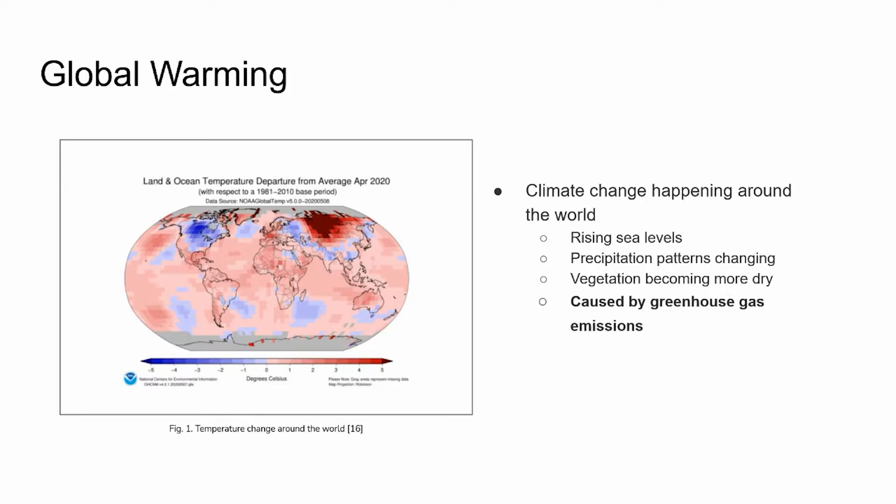Climate change for the environment and the world will raise sea levels, change precipitation patterns, and cause vegetation to become more dry, all caused by greenhouse emissions. How can we protect against greenhouse emissions?

For that, we have the Greenhouse Gas Protocol, GHGP, recognized by the UK government, developed by the World Business Council for Sustainable Development and the World Resources Institute. The GHGP helps define how companies manage and report greenhouse gas emissions, GHG. Crucially, it establishes three categories of emissions: Scope 1, Scope 2, and Scope 3.

In the article, we highlight two important notes. First, natural gas and oil for electricity and heat in buildings account for 25% of greenhouse emissions. Second, a significant amount of US commercial building annual energy usage comes from two categories: 32% to heating, ventilation, and air conditioning (HVAC), and 25% to lighting.

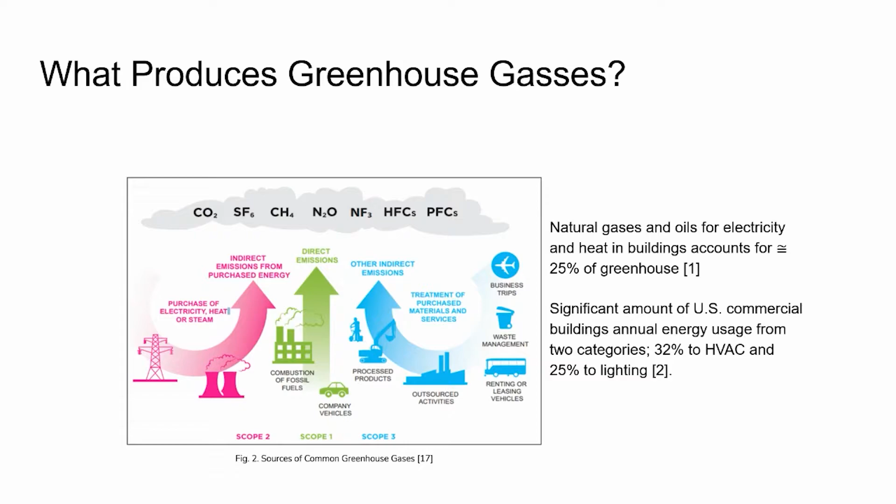For those reasons, our solution is to change people's consumption with smart windows. Recently, people have raised their trust in smart windows since they are environmentally friendly, cost effective, and practical.

As previously mentioned, global warming continues to negatively impact the environment around us. Recently, Silicon Valley and all across California there have been many wildfires that have ravaged the state, for example the SCU Lightning Complex and the LNU Lightning Complex, which both happened back in August. The duration of the wildfire season has been getting longer due to a prolonged drought and an increase in drier vegetation, all of which is caused by climate change.

With climate change being the main cause for these disastrous events, we ask you to consider implementing smart windows in your new facility to try and mitigate these effects.

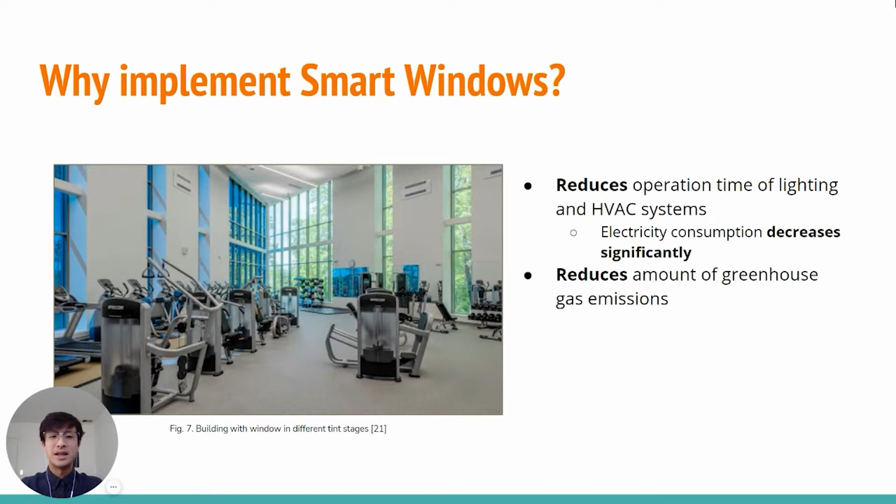With smart windows, the operation time of the HVAC systems and the lighting fixtures around the building will see a significant decrease. Less electricity spent on these systems will lower your energy consumption and decrease the amount of carbon dioxide emitted. Ultimately, this plan will help your company save money on the monthly electricity bill while also helping the environment by reducing carbon emissions.

Firstly, our research teams will analyze the three main types of smart windows: electrochromic, thermochromic, and photochromic windows. We must understand how each window functions and what the most optimal operating environment is for them. Because of climate change, we will also cross-reference case studies performed in other parts of the world that have a similar weather pattern to the one we are projected to experience in the near future.

In this case, we focused on one from Madrid, Spain. The building specifications and calculations for energy consumption, return on investment, and many more will be based on the Building America Center 2, which is located in North San Jose.

All of this data will be recorded on an evaluation sheet that our teams will collaborate on.

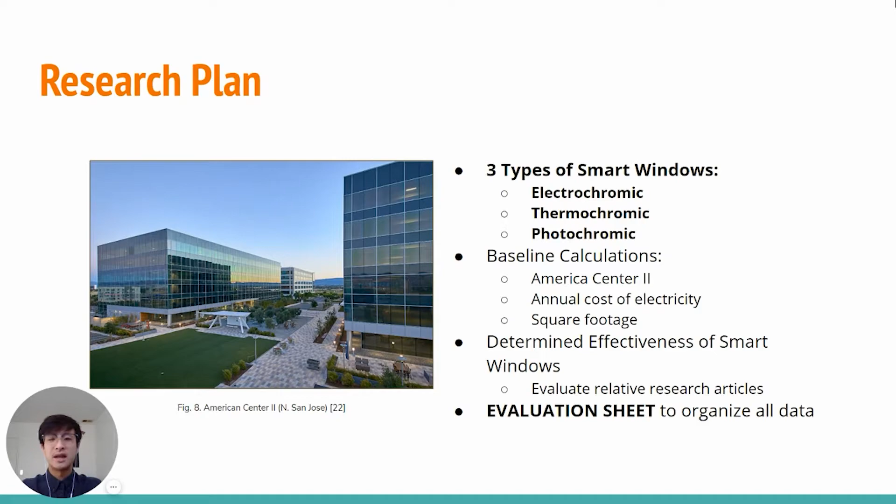There are three types of windows. The first is electrochromic: electrochromic smart window relies on an electric source of energy, such as voltage, for functionality rather than a natural source of energy such as solar energy from the sun. The tint of electrochromic glass is controlled by the amount of voltage applied to the glass. Applying a lower voltage of electricity darkens the coating as lithium ions and electrons transfer from one electrochromic layer to another. Removing the voltage and reversing its polarity causes the ions and electrons to return to their original layers, causing the glass to lighten and return to its clear state.

The second is a thermochromic smart window. It simply uses the heat from direct sunlight to tint the window when necessary. The more direct and intense the sunlight is on the glass, the darker it becomes. This allows the windows to dramatically reduce heat loading into the building, and because the glass transmission adapts continuously over the range of temperature, a natural balance and maximum use of daylighting is achieved. By design, thermochromic windows help reduce glare, fading, and noise, and increase safety.

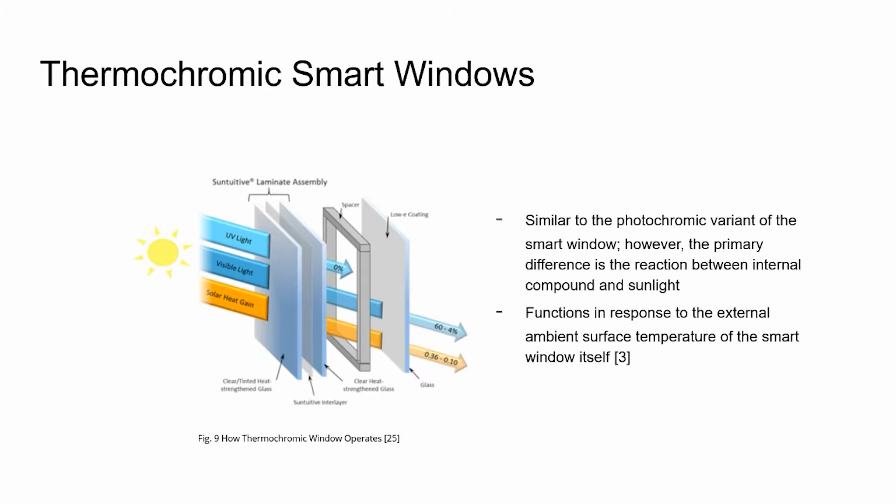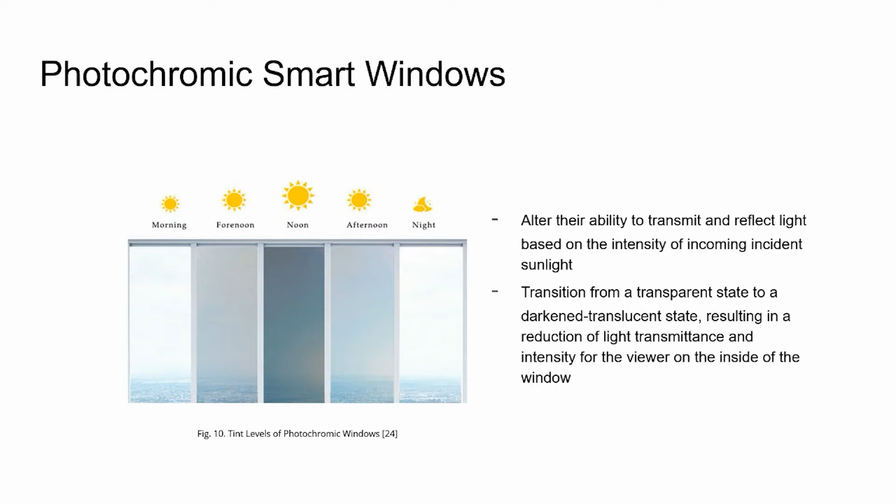The third is the photochromic smart window. Photochromic is a very common material we already use, like eyewear made with photochromic lenses. It transitions from light to dark when activated by light. The light must be intense enough, typically with enough ultraviolet radiation, for the photochromic lens to react, and vice versa — when the light that activated the lens disappears or isn't intense enough, the lens will return to its clear, untinted state again.

In order to determine a baseline for the increase or reduction among all smart windows for variables such as energy cost, energy consumption, and greenhouse gas emissions, external research articles must be considered. Luckily, researcher Tällberg and his group of scientists performed a simulation to determine the approximate amount of energy usage between these smart windows.

This study focused on three distinctive climates across the world. However, we'll be looking at the Madrid, Spain simulation results, as that city's climate is relatively similar to our climate in the Bay Area. Overall, the big takeaway from the simulation is that the primary source of reducing annual energy consumption is through reducing the need to provide electricity for cooling, especially in the hotter months.

This relationship can be seen in the figure on the right, where each factor of heat gain and loss is specified within the graphs. Looking at actual numbers, the electrochromic smart window requires 17% more power for the internal heat of a building to remain at a constant temperature, but we can clearly see that the electrochromic variant reduces up to 40% more energy consumption in the warmer months compared to the static window.

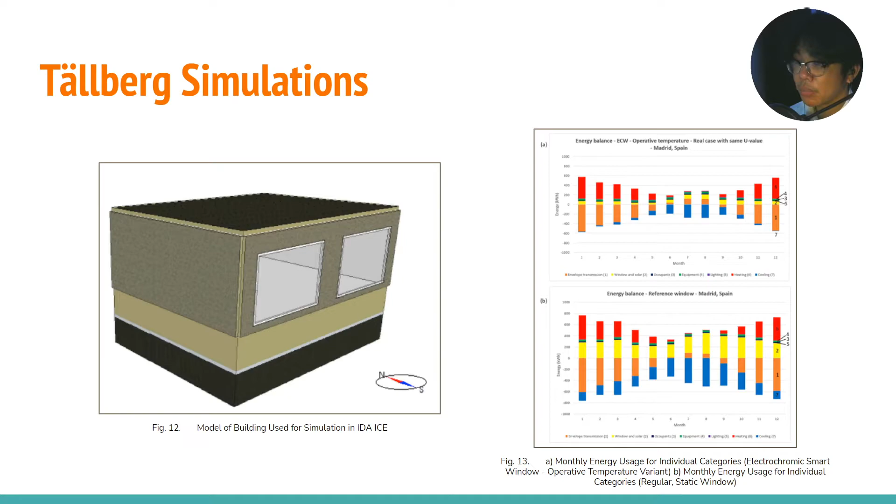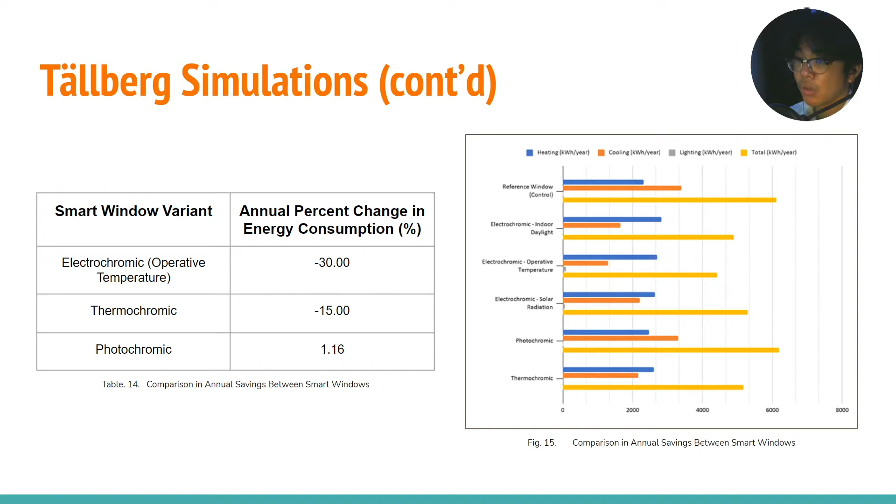Overall, across all three smart window variants, Tällberg and his group's simulations demonstrate that the electrochromic operative temperature variant smart window reduces up to 30% in annual energy consumption, with thermochromic smart windows reducing up to 15%, and photochromic smart windows actually requiring 1.16% more energy compared to the static window.

When determining which smart window is best for the company, we must first dig deeper into the topic and discuss the optical parameters that should best be considered. Based on Tällberg and his group's simulations, it's important to choose a smart window that is most efficient in the summer months in order to reduce air conditioning and cooling loads.

As a result, it's important to choose a smart window with a relatively low U value. This narrows our choices to the electrochromic and thermochromic smart windows. If the U value is substantially high, such as for the photochromic smart window, the high rate of heat transfer across the window will make cooling more inefficient, resulting in greater power consumption.

While both the thermochromic and electrochromic smart windows possess relatively similar SHGC values, the electrochromic variant possesses a larger SHGC value in its clear state and a lower SHGC value in its darkened state compared to its counterpart. As a result, the electrochromic window can be more flexible and adaptable than the thermochromic window, allowing the building's heating system to be more effective.

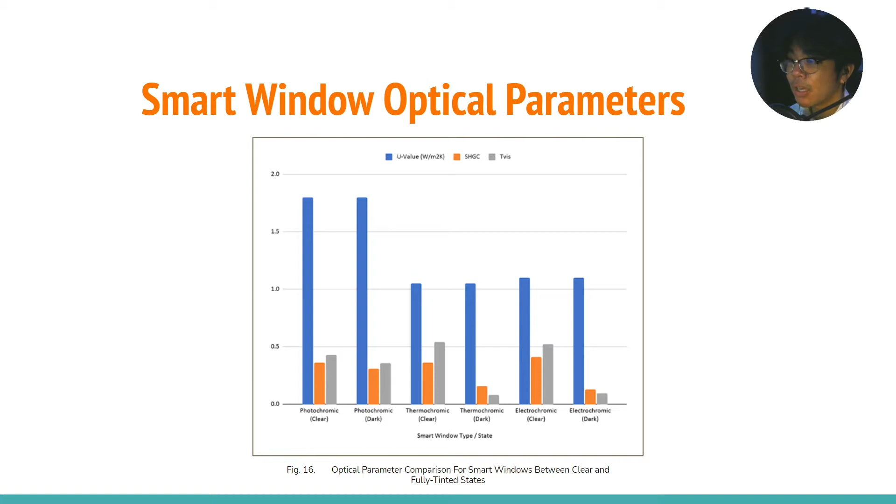Overall, the thermochromic and electrochromic smart windows possess similar optical characteristics. However, the electrochromic variant is most effective to a certain degree in reducing overall energy consumption due to its dynamic control input.

The model for the company building is based on the America Center 2 commercial building in San Jose, in which the total acreage of the building is about 460,000 square feet.

According to the U.S. Energy Information Administration, the monthly energy consumption for a commercial building is approximately 16 kilowatt hours per square foot. Since we're assuming Silicon Valley Power is the primary electricity utility providing energy to this building, the average cost of electricity is approximately 14 cents per kilowatt hour.

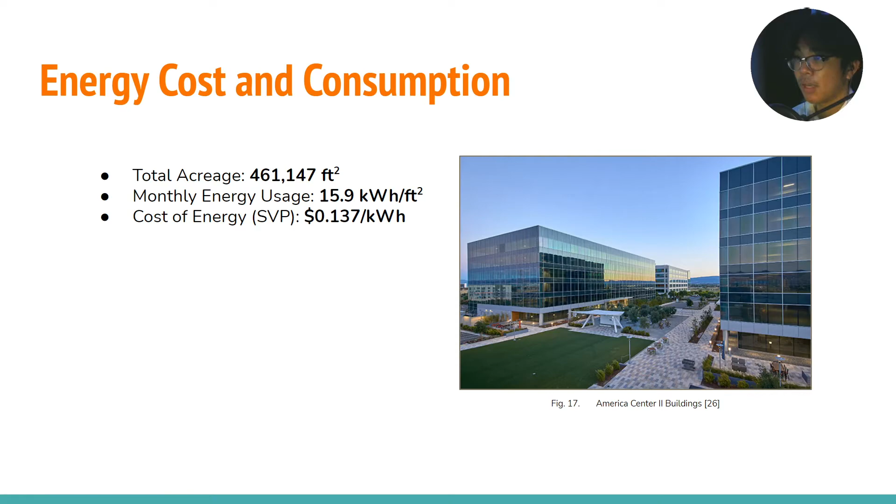Figures 18 and 19 illustrate and compare the energy consumption and electricity cost, respectively, between each smart window variant and regular static windows.

Thus, the potential monthly savings is calculated as the net difference in electricity cost between a control window and the respective smart window. As a result, the monthly savings in electricity are added within the current investment return.

Overall, the energy consumption for the regular windows is spread accordingly throughout each month, proportionally based on intuitive and arbitrary trends of power usage.

The estimated amount of consumed electricity and energy costs for each smart window variant is, of course, proportional to the results from the previous section with the Madrid, Spain energy simulations.

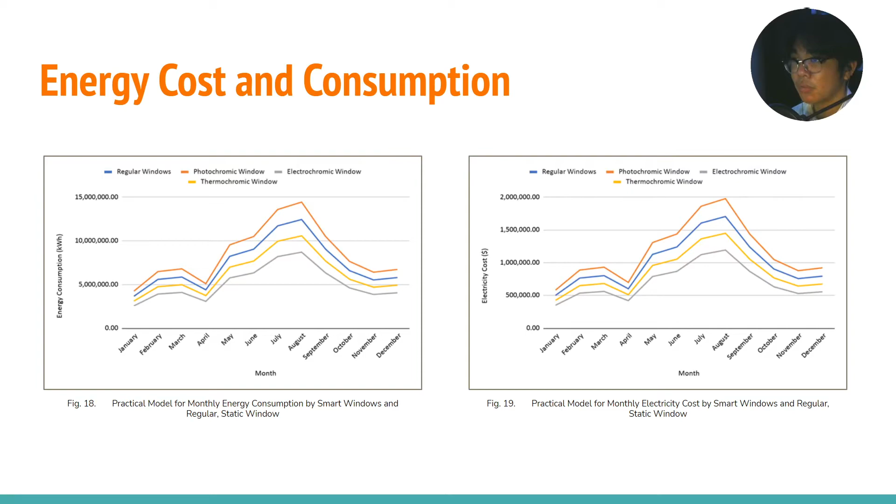When it comes to determining which smart window the company should invest in, there are two primary deciding factors that Samsung Group must consider: risk and return on investment.

While assuming that the monthly revenue of Samsung Group is constant across all smart windows, the amount of money saved from energy consumption per month will pay itself toward the net return on investment for that specific month.

Investing in the electrochromic window is considered a higher risk for the company due to the substantially large initial cost and a greater time to break even.

However, the overall amount of potential savings in energy consumption in the long term is significant. As a result of this significant cost reduction toward electricity, the saved funding can be utilized for other sectors of infrastructure within the company.

In contrast, investing in a thermochromic window can be considered relatively low risk for the investor due to the significantly smaller initial cost and a lower time needed to break even.

However, the business will not generate the greatest amount of potential savings in the long term relative to the electrochromic window.

Samsung Group is on par with developed technological companies such as Google and Microsoft. As a result, they possess a large amount of funding and are willing to invest in a more expensive product.

If the product is much more cost-effective in the long term compared to other related devices, Samsung Group will also be more willing to invest in a product that requires a higher upfront cost.

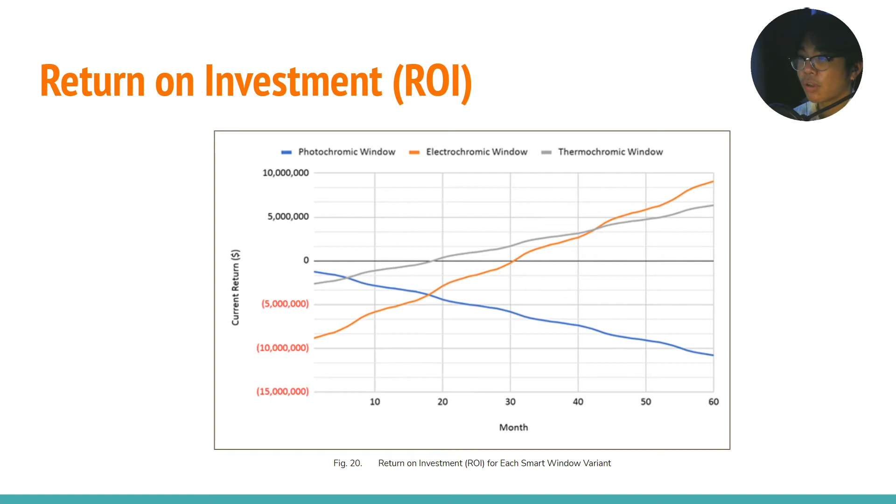Overall, the electrochromic window variant based on operative temperature is the type of smart window we are proposing, in order to provide the company with greater reductions in energy consumption and costs, as well as to maximize overall cost savings. Upon acceptance of this proposal, the first step will be to send out a team to evaluate your proposed building design.

Window installation is usually one of the last things to take place when constructing a new building. Depending on how many workers we can afford based on your initial investment, we will set up as many workstations as possible to lower the amount of time spent on the project.

The window installation team will begin on a different side of the floor depending on where other workers are stationed, in order to prevent any interference between different workers on the building.

They will take the quickest path through each floor to minimize time spent moving workstations, and we will have quality inspectors periodically come and inspect installations to see if the windows have been properly implemented and will function correctly.

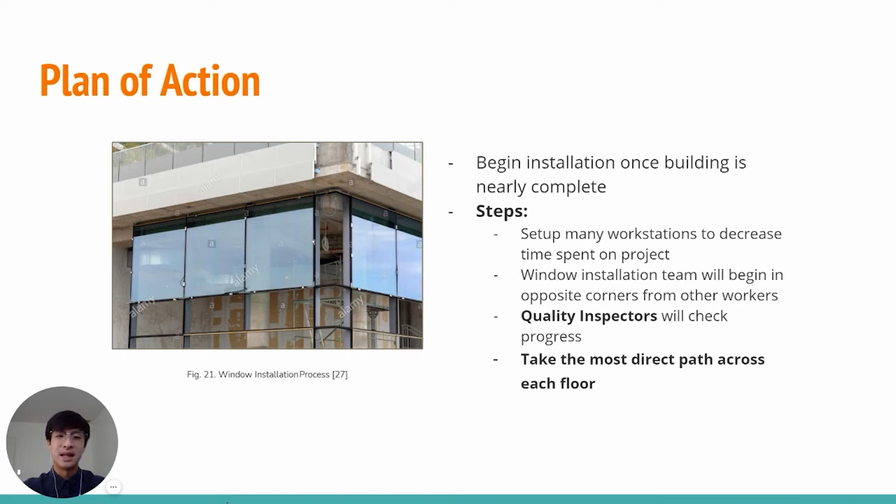The teams required to complete this project include 2 research teams, 1 planning team, and the workers responsible for replacing the windows. The research division will consist of 2 subteams with 4 members per team.

According to the National Academy of Sciences of the United States of America, 4 members for a research team is the optimal amount for the best group cohesion.

The first subteam will have 2 mechanical engineers and 2 electrical engineers. They will be tasked with researching how each smart window works and the process of replacing windows.

The second subteam will consist of 4 environmentalists, all of whom will analyze local weather patterns in various places similar to the climate in Silicon Valley.

The planning team will have lead engineers from research groups and budget managers who will compile all the data that has been gathered into an organized sheet. The team of workers will be determined when the budget managers figure out how much money is left.

Uncertainty between each member will only hinder the project. The budget consists of construction costs, workers' pay, insurance, as well as drafting and any other equipment fees that may come with it.

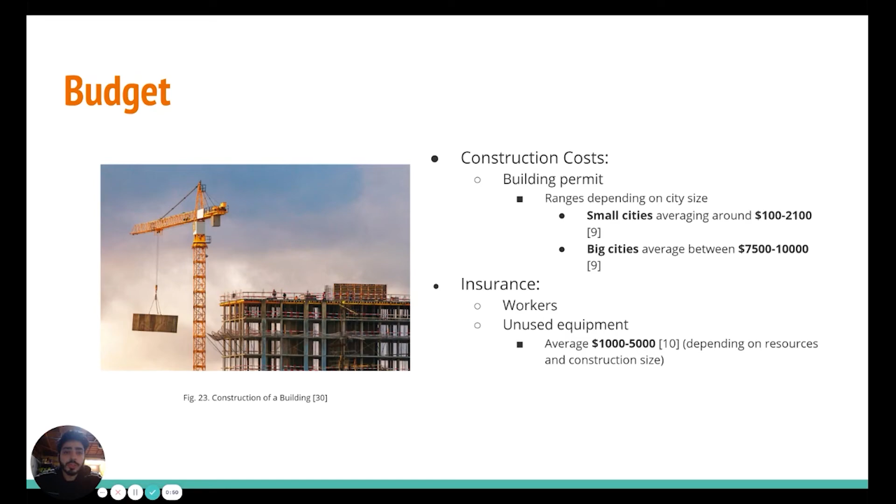Continuing on with the budget, we need to optimize the layout for the windows, so we need to pay for drafters and designers. This is typically about $50 to $150 an hour, and we expect about 72 hours of work done for this layout. Average drafting costs could go between $2,000 to $10,800, solely depending on the previous experience of the drafter, the delivery time, and the design safety requirements met.

Continuing on with the budget, equipment and material: we do require a boom and scissor lift for operators to be able to go up to the higher spots and install windows. We average about 2 to 3 weeks for window installation, and the average cost can be $1,000 to $1,500, with a max cost of about $4,500. However, we do need a certified operator to operate these boom and scissor lifts, which would be about $16.45 an hour, accounted for in the budget.

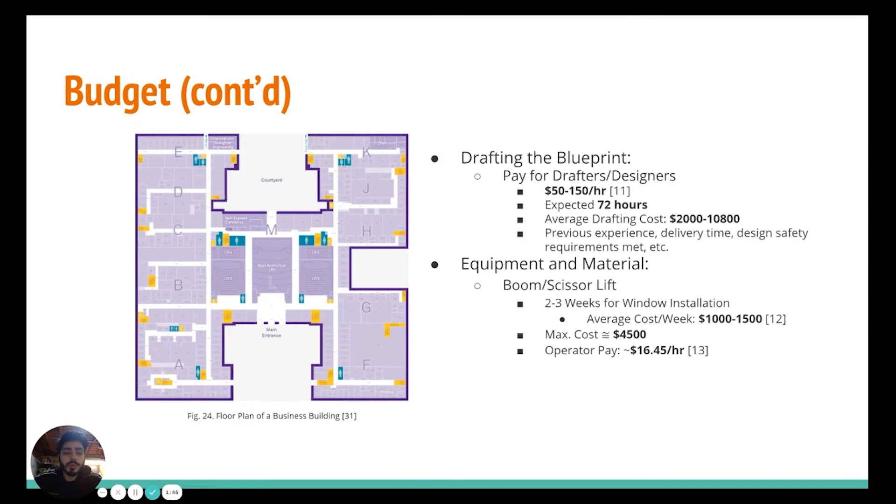Continuing on with equipment and material, we do require a crane to bring our windows and other necessary material up. This could be about $1,500 per month, with no actual expected date, because we could be using this crane on and off—it could take longer than a month, or less, so that is unknown. You do also need to pay another operator certified to work on a crane, which is about $36 an hour.

Now, a main part of the budget is the window cost, which is one of the things highlighted throughout the whole presentation. Electrochromic we know is $100 per square foot, thermochromic is $30 per square foot, and photochromic is $13 per square foot. This varies based on the basic budget the company starts off with, and from there we will figure out the optimized window solution.

Now, the last part of the budget that we take into account is cleanup. This is something that needs to be determined, as there are unprecedented uncertainties we can't really account for, like unused materials, hazardous materials that need to be recycled correctly, and other recycling in general.

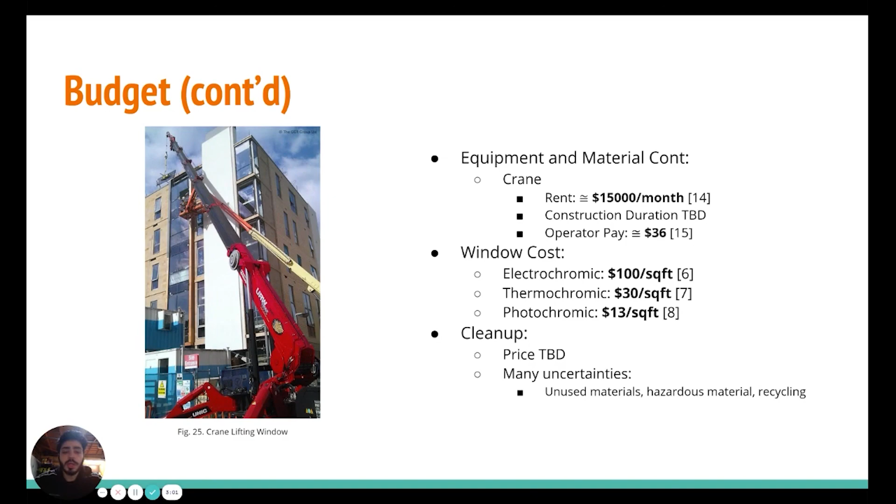To wrap up this presentation, I'd like to highlight the benefits of the smart windows, which we've covered throughout this presentation, as we've shown and proven that it slows global warming and is an eco-friendly solution that can save money, not only in the electricity bill, but in overall investment into a building.

The final proposed smart window that we've decided to go with, based on our research, is the electrochromic window, which generates the most profit in the long term. However, it does cost the most, but it has a return on investment turned to profit in roughly 2.5 years, which is why we've chosen electrochromic to be our main source and product to be pushed out.